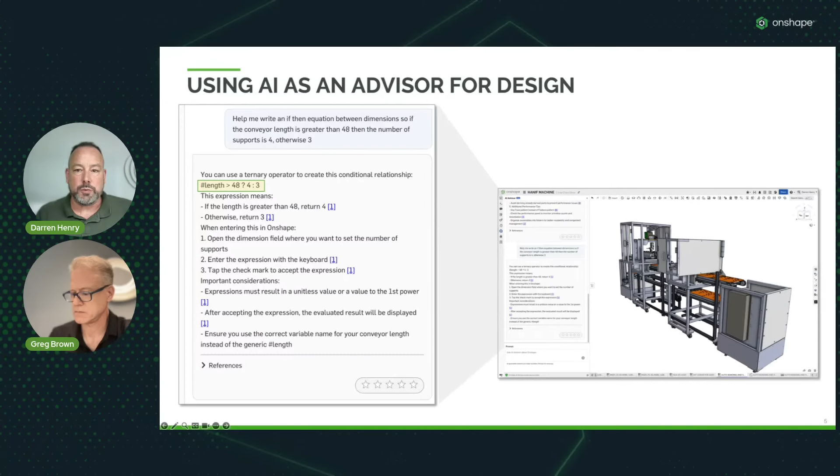But using AI as an advisor where you can have a natural language prompt and it assists you is just one way that AI is helping CAD. Another way is discrete toolkits. So we're seeing discrete tools that are purpose-built to do a specific task. We're seeing those appear in a lot of different CAD vendors' applications. And we're no different. We have a number of these.

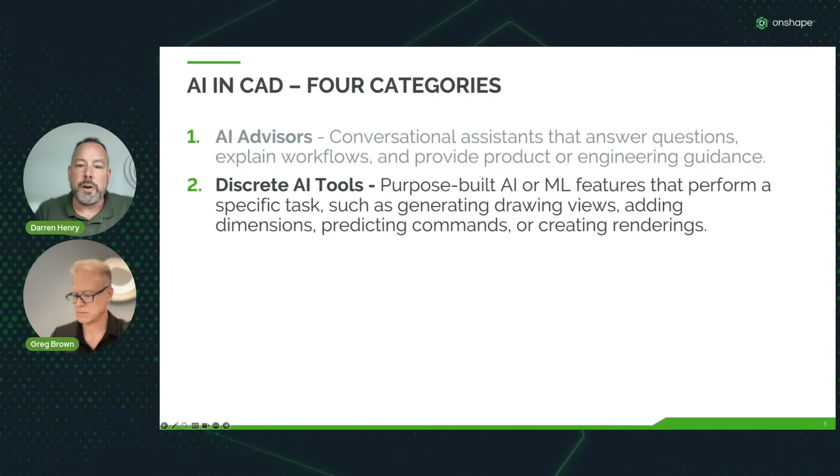You might be familiar with Onshape's replicate annotation. So this is using machine learning to look at a view, and if you choose to select that view and you want to replicate its annotations, you can pick a similar view, maybe in a completely different drawing, and it will use its machine learning algorithms to attach those annotations correctly. So if you're doing any type of family of parts, this is an extremely powerful capability.

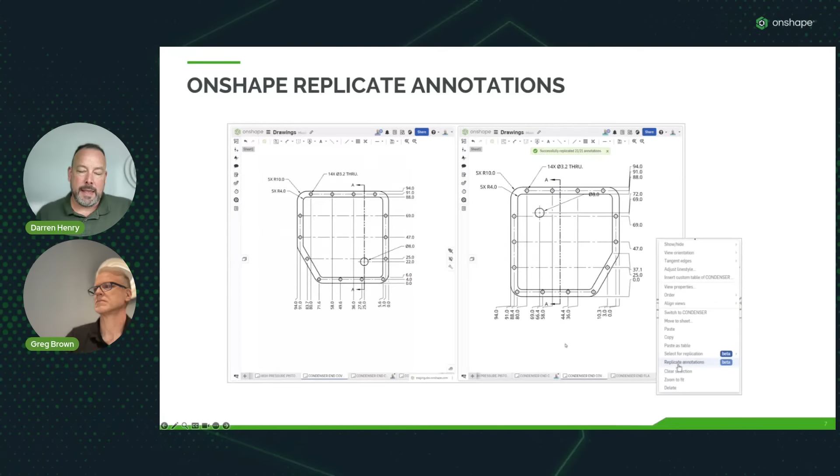It's just one example of leveraging AI or machine learning to build a purpose-built tool that will save you a tremendous amount of time. Now, you're going to see a lot of these types of discrete tool sets emerge, and some will fit your workflow perfectly, others may not, but the purpose of this is to actually save you time and work within the confines of the CAD system.

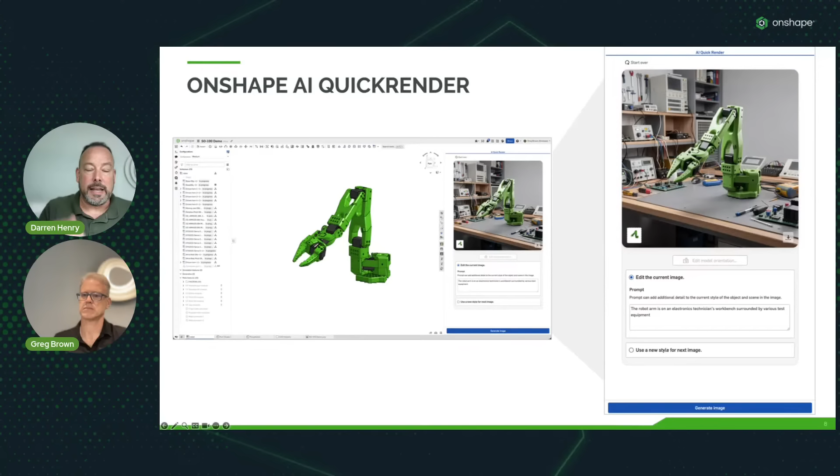So in many cases, we feel that ray tracing may be overkill for some of the applications you want. Maybe you want quick rendering, maybe you'd like to see your product in a sort of interesting environment. Well, quick render suits that bill. And again, it's a purpose-built AI tool that does a specific task. This one will be released through our Onshape Labs program. We'll talk a little bit about that, but right now it's in early visibility with some customers. We plan to put it in the hands of all of our Onshape customers in the near future.

A third way that AI is being integrated into CAD is through natural language agents. We've actually shown a number of proof of concepts at a lot of different events, but these would work in product similar to Onshape AI Advisor, but they have the added benefit of gaining context to your work, and they can actually execute tasks. I have an example to show you of an agent.

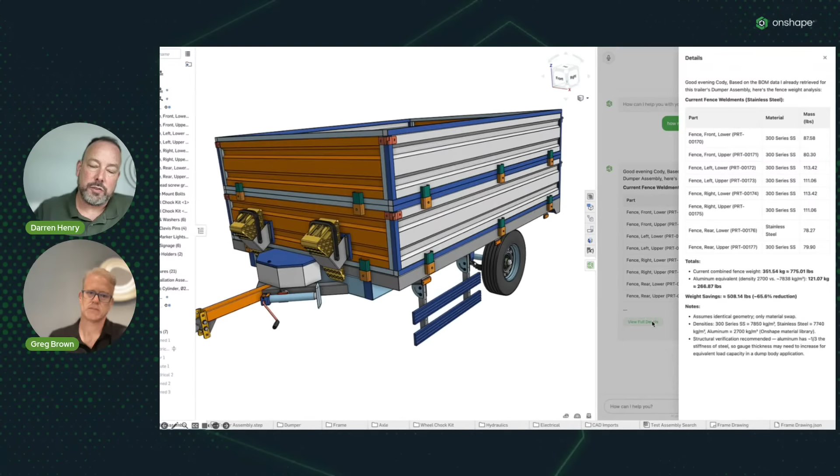So what will happen here is we're typing in a question, asking it, hey, if we change the fencing of this trailer from steel to aluminum, how much weight will we save? And the agent actually understands the model. It extracts the weight of the different fence components. It swaps the material for aluminum, and actually in this case, it can save over 500 pounds. So you can see that these types of agents will work inside Onshape, have access to your data and get context, and they can actually provide you important insight. They can actually do tasks, or they can be stacked to do multiple tasks.

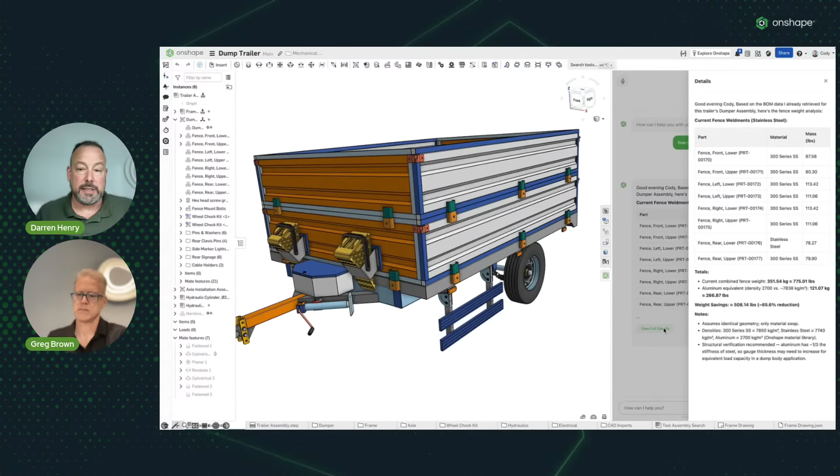How it works is we envision there'll be multiple agents, and when you ask a question, it will first go to an orchestration agent, which will then invoke the right agents. It's important to point out, though, that this has to be something that you have control of. And in our vision, you actually invite the agents to work on your projects, much as you would a teammate. So you have control over the permissions you give it. The task can be assigned, and actually multiple tasks can be assigned in natural language.

And what's really important is that you want to be able to have the agents learn about your information, but keep that information private to either you or your company. And that's something that we're working on. The other thing that's nice about dealing with a database-based system like Onshape is that we track all activity, so you'll be able to see what the agents actually do, and of course, be able to restore before the agents actually did those executions if you have to go back in time. So the key here is, as you think about agents working inside your CAD system, I think what you need to consider is, do you have control of those agents?

Is everything tracked? Is it clear what the AI agent did versus a human? And is it something that you can literally invite them to and then revoke access to at a later date? All those are things that Onshape is working on. You'll see agents in the product later this year.

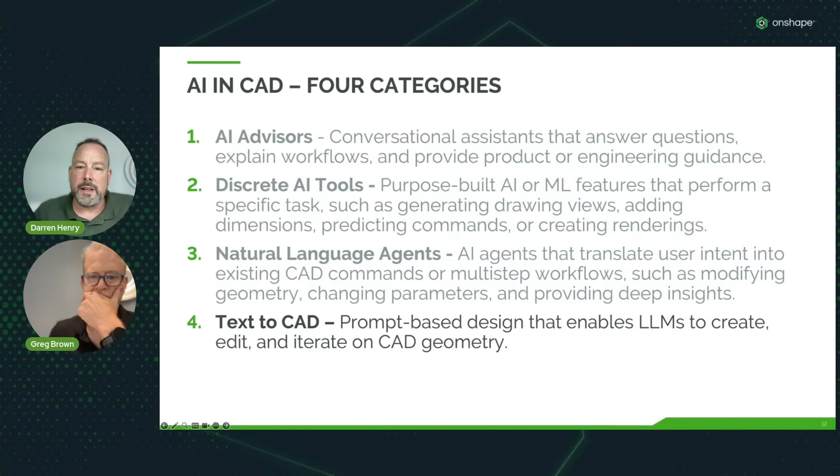And then the last category is text to CAD. And as I mentioned earlier, this is one that's getting a lot of hype. There's a lot of social media where people are saying, hey, I asked Claude to create a hinge bracket or a Raspberry Pi case, and you see that it's working on utilizing CAD and building these geometries.

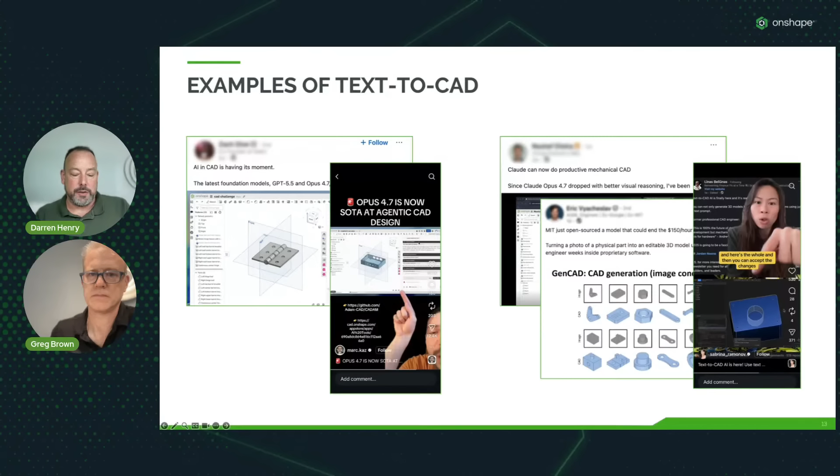Unfortunately, we think if you double click into some of these results, you're going to come to the same conclusion that we do, that it's just not ready for prime time. Here's what we're learning. We're seeing that most of the successful examples of connecting an LLM to a CAD application are yielding models that are low complexity and not easily editable.

But more importantly, we're finding that it's lacking understanding of the geometric relationships. If it had to create a sketch on a surface, in many cases it's creating a construction plane, not sketching on those surfaces. It seems to be lacking the understanding of the sketch constraints, the spatial interpretation, feature dependencies, as well as what's related. If you said, find me all the adjacent faces to a fillet, LLMs struggle to understand that sort of spatial recognition.

And we feel that this is a miss for what the market wants. The market wants AI to understand their domain expertise, build models with design intent that are robust and can easily be edited by a human.

To illustrate this point, we can ask an LLM to make a washer model, and it will do that. But if you try to edit that washer, you might find that the sketches lack the intelligence, the constraints. It doesn't know that the two circles are concentric. It may not know to apply the dimensions. That's a rather simple example, but it illustrates one of the challenges, that LLMs don't necessarily understand sketch constraints.

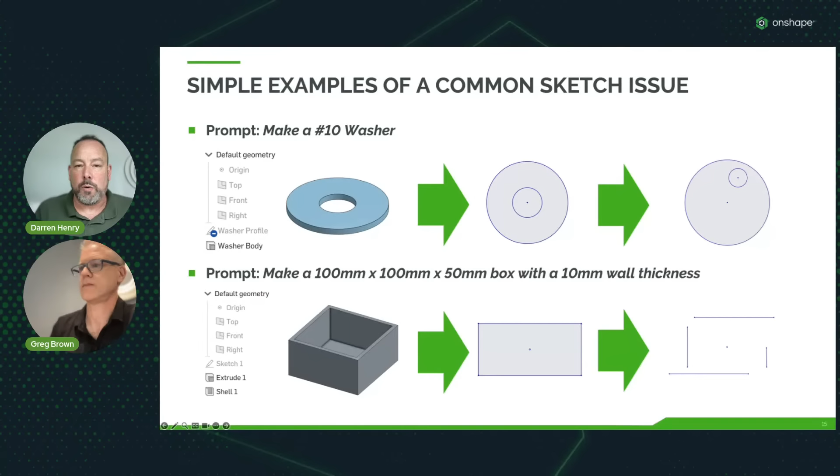What we do realize, though, is that AI is incredible at coding. So as we approach these problems, we think, boy, wouldn't it be great if we could code our way through all the different challenges?

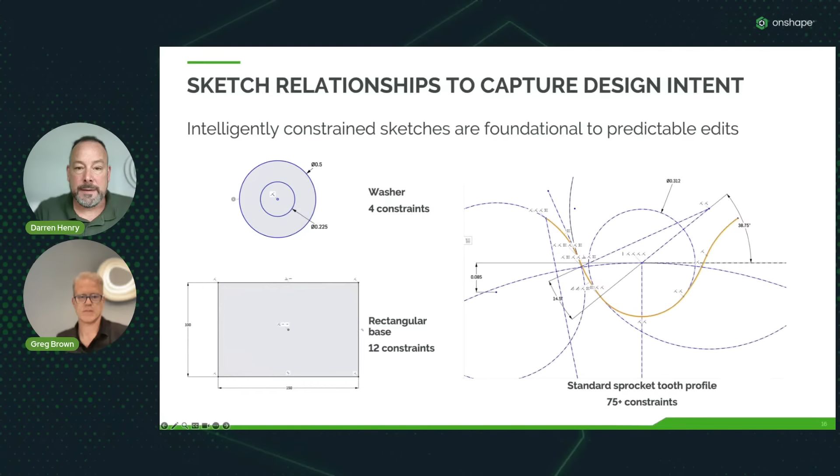And it just so happens that Onshape has a very unique coding language that we put in from day one. And our intention was a coding language that would allow our human users to customize Onshape to suit their needs. It's different than a scripting language, like a macro scripting language, which may let you push certain buttons or execute certain CAD commands in a sequence. What Onshape FeatureScript allows you to do is actually build new buttons, new CAD capabilities.

And in this example that I'll try to show with my mouse here, this is building a wavy spring. You can see that it actually built a single feature that captures this wavy spring. So we're building a new CAD command.

What's great about this is FeatureScript understands topology and the feature dependencies. It can query faces and edges and adjacent geometry. So it really understands, or can understand, all those spatial challenges that LLMs are faced with. It can easily regenerate features with design changes. So it's calculated much like an extrude or a fillet command, exactly like that. It's the same code that we use to build our features. And it really encapsulates engineering logic.

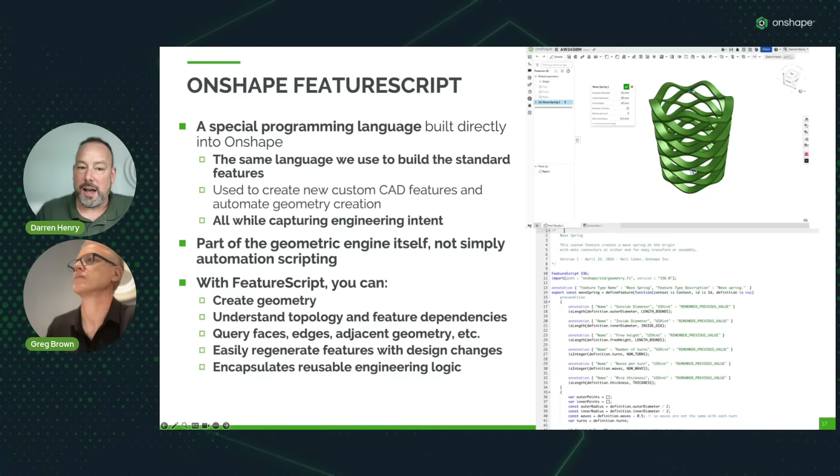So this is key. With FeatureScript, you can capture the design intent. You can build advanced features with feature dependencies. And the end result is human editable with a little interface that comes along for the ride, much like you see here for the wavy spring.

Now, the big breakthrough is that our teams at Onshape Labs have created an Onshape FeatureScript MCP. And what this does is it allows the LLMs to actually code FeatureScript, but not only code it, it will debug the code, write the custom feature, test it, run it within Onshape, look at the results, and iterate until it gets a result that it feels is appropriate, and then present those results to you.

So with the LLM, you put in a prompt, it interprets the prompt, it will prototype the snippet, write the feature, debug it, run it until it gets a result, validate those results, and then deliver to you. And if you want to then further test it and edit it, you simply reprompt again. So it's quite an interesting approach, and we're going to show you firsthand how it works.

But the most interesting aspect about this is it allows you to get a fifth powerful category of having AI work alongside your CAD, which is AI-driven customization. So not only will this build intelligent geometry, but it will actually allow you to extend the value of your CAD, actually tailor it to the needs of your processes or your products. And the other thing that's really exciting is it is available today through our Onshape Labs program.

So that's my prelude. I think I set you up nicely, Greg. Let me pass the screen to you, and we can take a look at some of this capability. Okay, we should be right now. Have you got the right thing? Yes. You can see my screen? Yes.

Yeah, okay. So hi, my name's Greg Brown. I head the product group here. So I'm looking after the product management, the strategy, the roadmap and prioritization. And this obviously is changing the game for ourselves and the industry. Thanks, Darren, for that setup. There's a lot of nuggets that I'm going to delve into.

But primarily, I want to take you through a series of use cases, all with the Onshape FeatureScript MCP, to show you that it's not just about creation of geometry in a standalone way, although that is a very common, very powerful and useful thing. But the rest of the spectrum might include things like creating reusable code for your own other custom features, or creating a sophisticated feature which doesn't stand alone but manipulates other things, all the way through some more code wrangling, which we'll talk about, to a sophisticated standalone application.

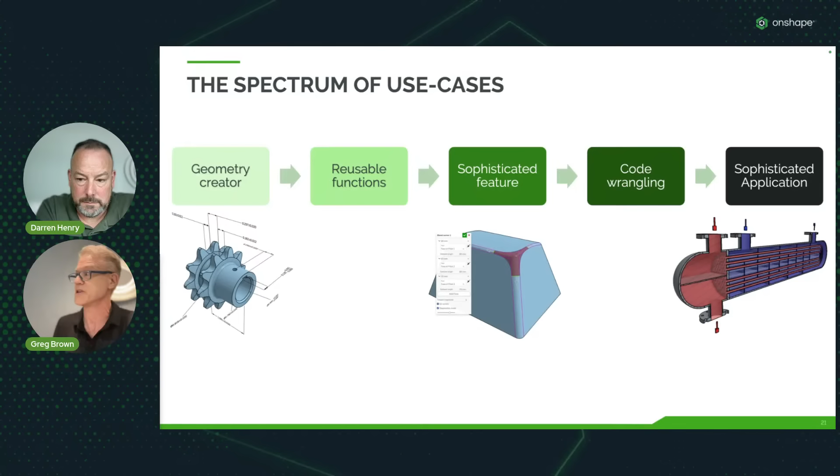And I did see a question in the chat that somebody wanted to see this heat exchanger example. So let's start with the standalone geometry creation. And I've got a bunch of different examples here that we've created using the Onshape MCP with an LLM such as Claude Code or Copilot.

And before I go into them, there are different approaches to it, but they all have the same thing. Basically, a single capturing of requirements fed into the LLM will create a custom feature, which then can be reused and shared very, very easily. So let's have a look at this live. Now, I'll show you it in use, and then I'll explain how it happened.

So I've got a feature. Along the top of the user interface of Onshape are the features that we create, and we use this FeatureScript language ourselves. But of course, you can create custom features. And now, using the LLM and Onshape FeatureScript MCP, you can create your own special features like this.

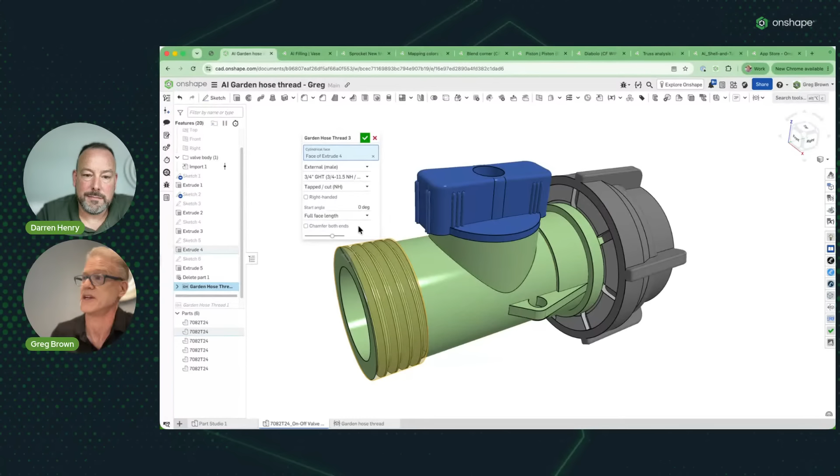This is a garden hose thread creator using the ASME B1.20.7 standard. The person who created this, I think it was Darren, prompted the LLM to say: I want a feature that stands alone in Onshape that allows me to select a cylindrical face in the model and cut the thread according to the standards and options provided. The prompting process built out the feature with all of these different options, and now this feature exists in Onshape's model as a feature.

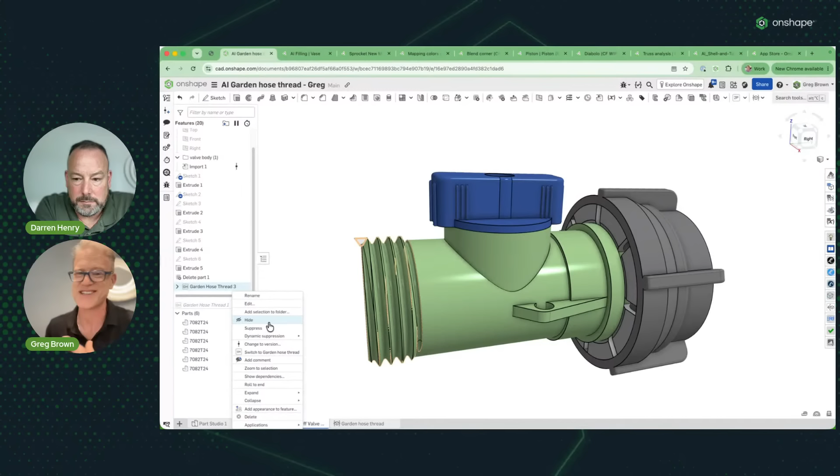You can do all the normal feature things to it. You can come back and edit it, suppress it, pattern it. You can do all of the things because it is a feature. This is the really important thing about feature script inside Onshape. I've got another example here, which is another really fun one.

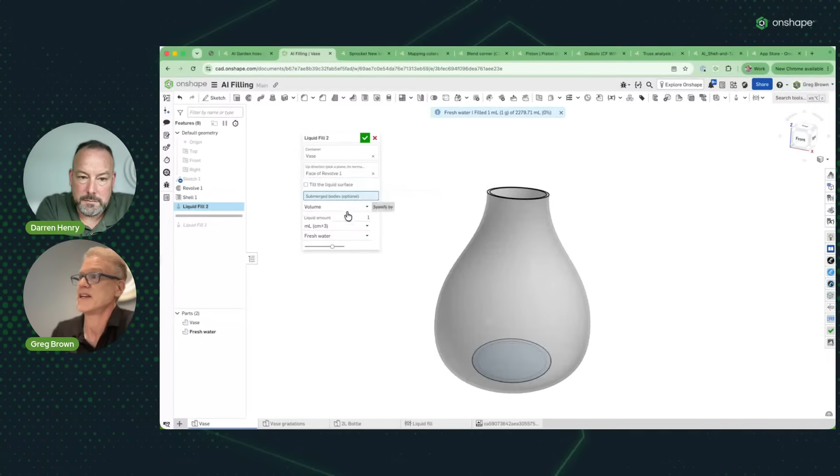So I've got a bottle, and the feature we're going to create here is called the liquid fill. I select the container, in this case the vase. I select a reference direction, and then I tell it how much liquid I want to put in, whether it's 1.75 liters, and it will work out the height of the liquid in there.

Again, the prompting for this was purely on the requirements and intent. I want you to be able to create a standalone feature in Onshape that detects the inside of the container, that detects how much volume according to different criteria here, maybe a percentage fill or a mass of a certain liquid. And then the MCP server is working in harmony with the LLM to create the code that creates this.

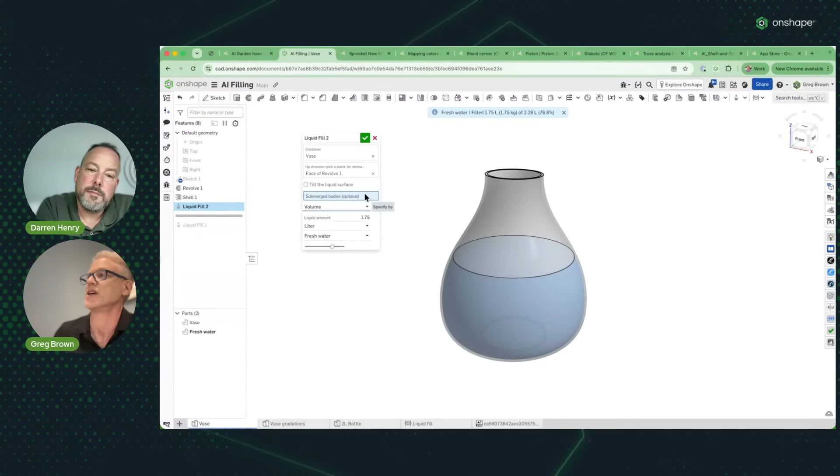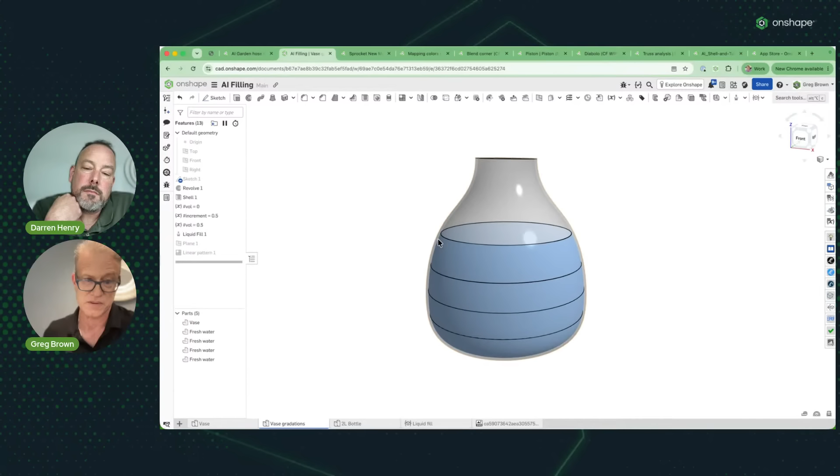Now this becomes really, really powerful when you take some of the other Onshape capabilities and make them work in harmony with it. In this case, I've created a liquid fill for the first 500 milliliters, and then I'm using a feature pattern that says let's do this for 500 milliliter or half liter increments. Now we can see we've created the gradation lines on the side of this bottle. This is just using the feature that the LLM and MCP server created, but then using it in a normal Onshape workflow.

And I can do things in a normal Onshape workflow, which is to go back and edit a sketch perhaps. This is where it becomes really cool, because we have an interactive way to affect that, and we can see the levels automatically updating and regenerating, because this is a feature. It's not a macro that we've created - it's actually a real honest feature inside Onshape.

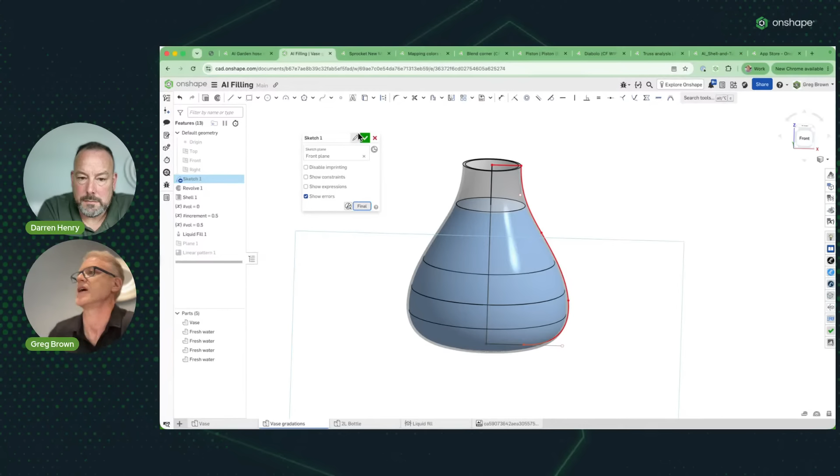Now this was done purely from prompting and requirements, and that feature is now usable - I can put this into my saved feature list. I've got a lot of features that I've created in here, and I can add this liquid fill to that one.

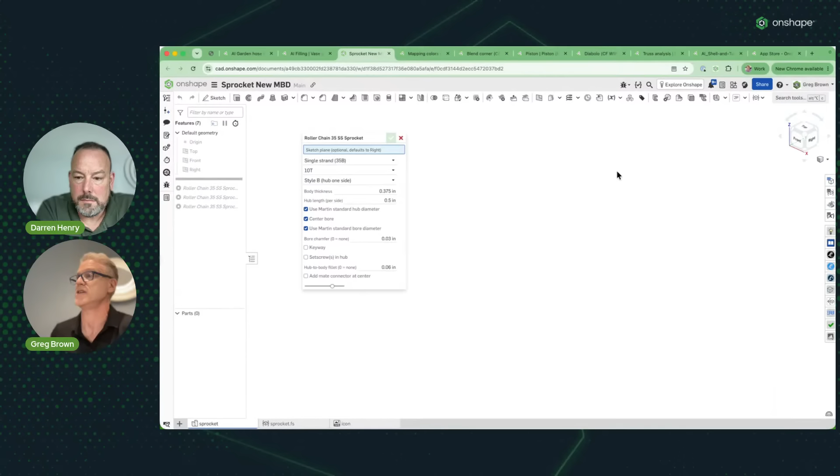Now, the third example of this geometry creation genre is a common piece of equipment you might be using: a roller chain sprocket. For a roller chain, the prompting was: I want you to create a standard roller chain sprocket using a certain standard, from a catalog that can be looked up online. And I want you to add all of the options that the catalog is providing, whether it's a single strand, double strand, or triple strand, or change the number of teeth.

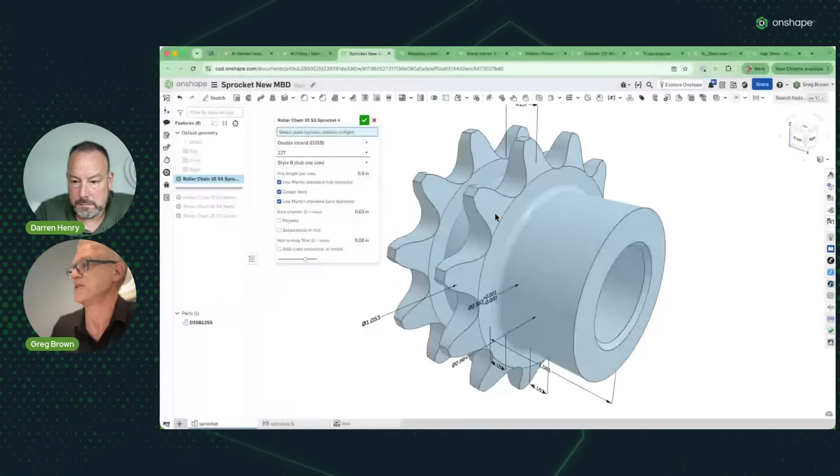And all of this is a pure parametric model built and driven by the standards of this particular catalog being used online. Options such as building the keyway in, or a set screw affordance as well. And then you can see how it's even got the nice cosmetic thread for the set screw in there as well, and there's some interesting annotations you can see on this.

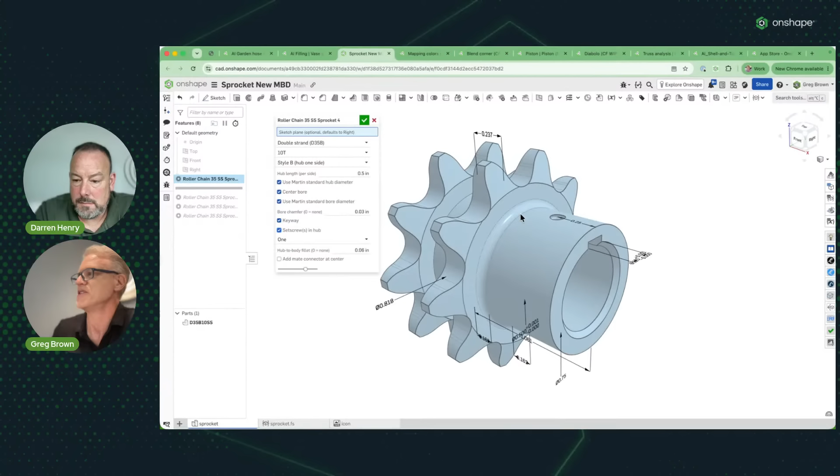All of the geometry, all of the annotations, all of the lookups to the actual catalog were created by the AI in conjunction with the MCP, so that the MCP server could tell the LLM how to create this, how to make the sketches constrained, how to make them parametric.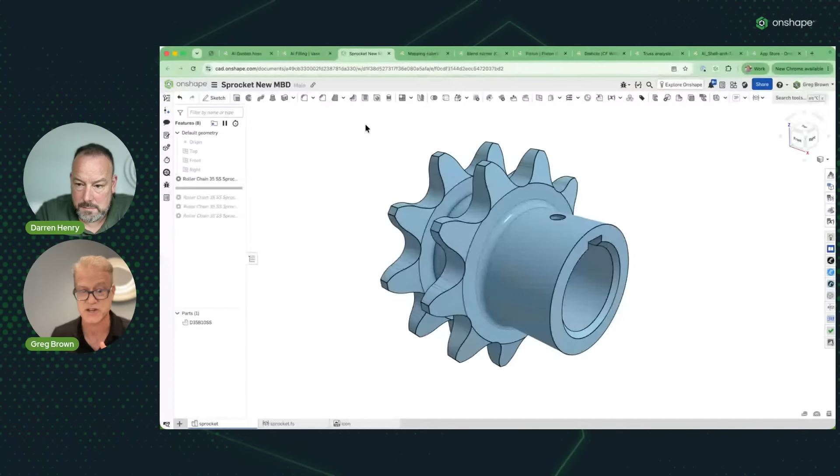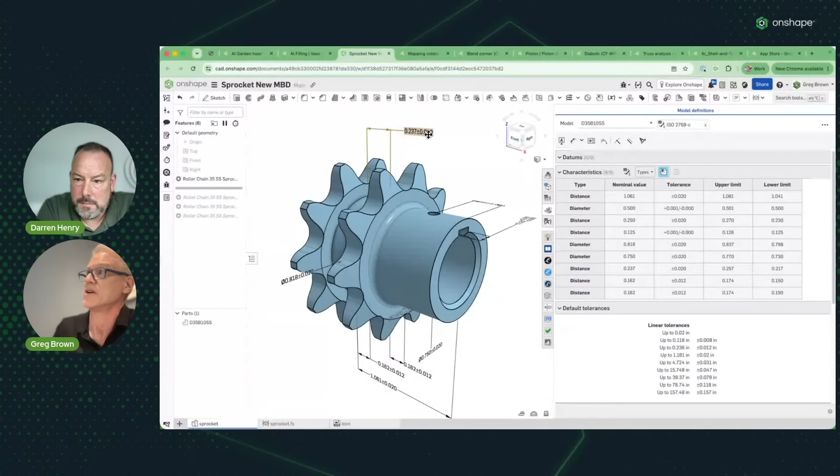Those annotations weren't just showing dimensions, they were actually the MBD annotations. We added MBD in Onshape fairly recently, but this is a really powerful use of it, because the LLM is doing the heavy lift as part of the feature to automatically create these annotations. And it works seamlessly, because if I add a default tolerance scheme, all of those numbers will automatically update.

So that's a really quick example, a few different examples there. Now I'm going to go over to a Visual Studio Code example to show you how it might look when you're operating this. On the right-hand side I've got my chat, and here I've got some code being generated by the chat.

I'm using Copilot, and I can choose what particular model I want to use, whether it's a heavyweight one or something lighter weight. You have to be careful, just like you do with AI. I started the chat saying, I want you to create kind of like a shrink wrapping feature that will take any model I give you and create an organic shaped shrink wrap around it.

And so we went through a number of different options. We all use AI differently, whether you're a pure programmer, a product manager like myself, an executive, or whoever, right? We all have different ways of approaching the chat. My way is, I know a lot about FeatureScript and I know how to program it, but I have more ideas than I have fingers to be able to type that code.

So using the AI and the MCP server has unlocked my own productivity insanely, because I can come up with a crazy idea and get a proof of concept in record time.

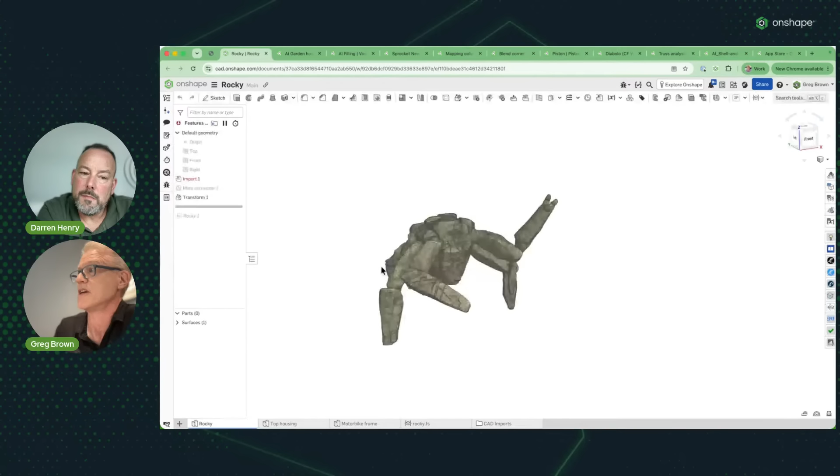So the crazy idea that was happening here was that I could bring up my model and take any geometry—if you've seen any films this year, you probably should see Project Hail Mary, it's a good film—and I wanted to create a feature that would take any object, including mesh like this, and encapsulate it in an environment just like Rocky would have wanted.

It's an interesting feature because it finds the extents, and it's not a pure tessellation. It's actually doing something a little bit more organic and creative. And I built that into the prompt. I said, I don't want you to just do a bounding box and tessellate it, I want you to do something that looked like the film. I used real human language to talk to the LLM to get to this point.

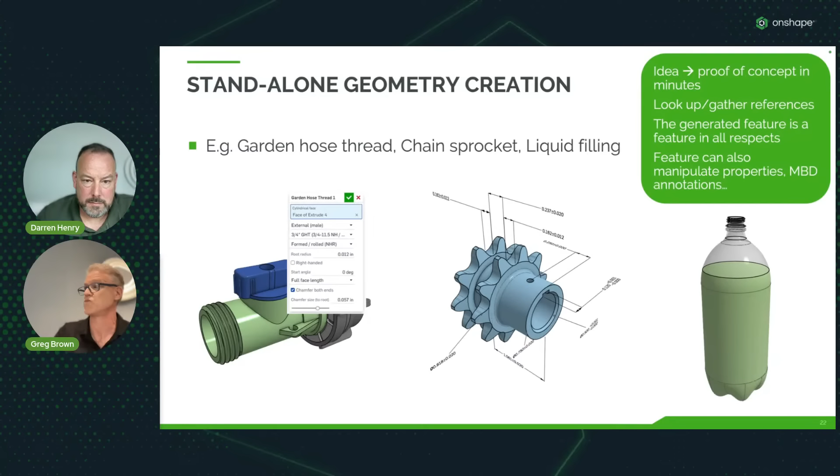So what did we learn? We can go from ideas to proof of concepts within minutes. We can go outside of our own thinking and look at searches online to get references from catalogs and so on. The features we generate, whether it was the garden thread, the sprocket, or the filling of the liquid, these are features in Onshape in all respects. They can be suppressed, edited, patterned, and all of those good things. They can also manipulate properties such as material appearances and MBD annotations. Very important stuff.

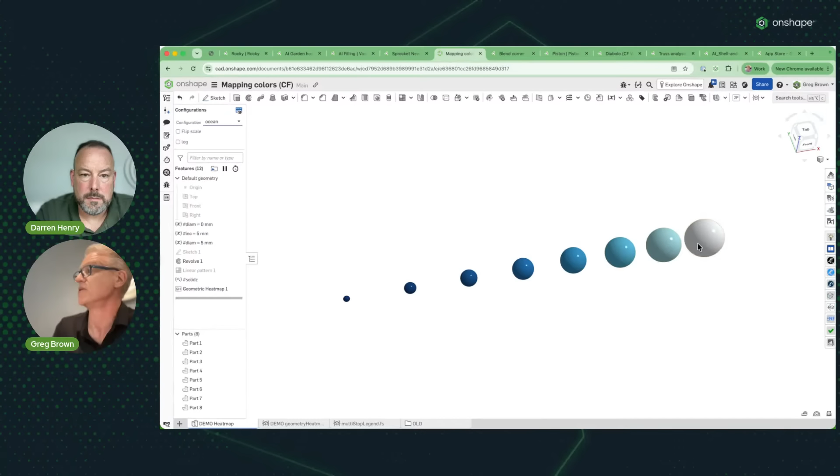Moving on to a quick one here, more for those familiar with programming already in Onshape with FeatureScript. What I found myself doing quite often was making a feature—I built one a long time ago which would color code parts according to their volume, surface area, or a number of different criteria. And I found I wanted to do the same thing in a slightly different feature, and another feature, to create some color spectrum.

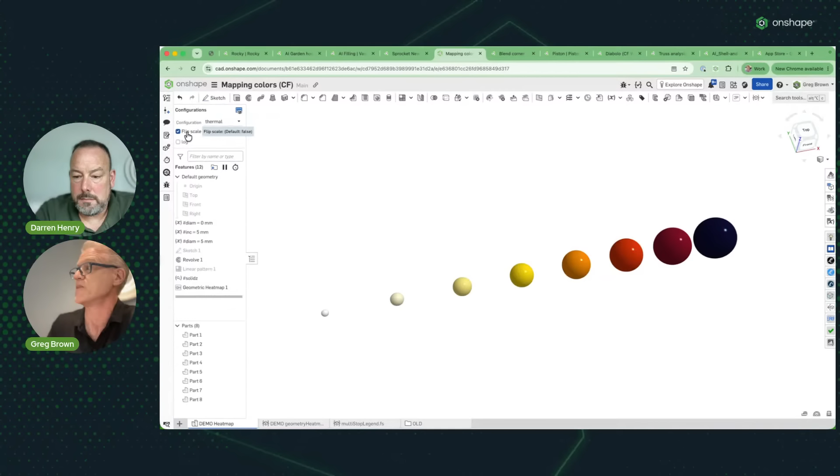So I got the LLM in conjunction with the MCP server to create a reusable set of code, like a library. The MCP server's benefit here was that it knew how to insert and put code into a feature studio, which is what's inside this Onshape document. Secondarily, it knew how to refer to it. So when I do a different feature, I just say, use my library to implement a reusable set of code that has things like different color maps, the ability to flip the scale from one end to the other, or to create a log scale instead of a linear scale.

That code function block is easily reusable. I do this all the time now because in my own custom features that I still build by hand sometimes, I have a library of reusable things, which is very valuable. So it's a really good tip to get the LLM not just to work on one feature, but to build stuff you're going to need in the future, and then tell the AI to reuse those things rather than developing them from scratch each time.

Which brings us to the next tier of sophisticated features. Sophisticated features don't just stand alone and create their own blob of geometry, but they interact with other things you might give it in the form of a query. You might find that a particular CAD system has different ways of doing things, and you wish that could be done in Onshape as well. So here's your chance.

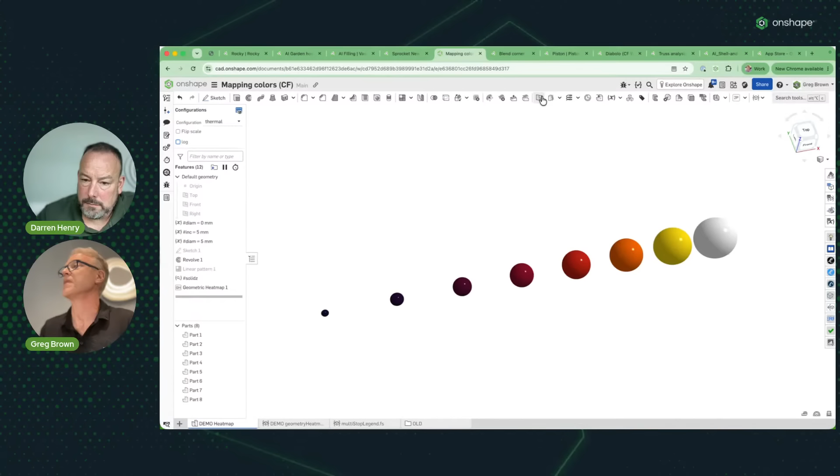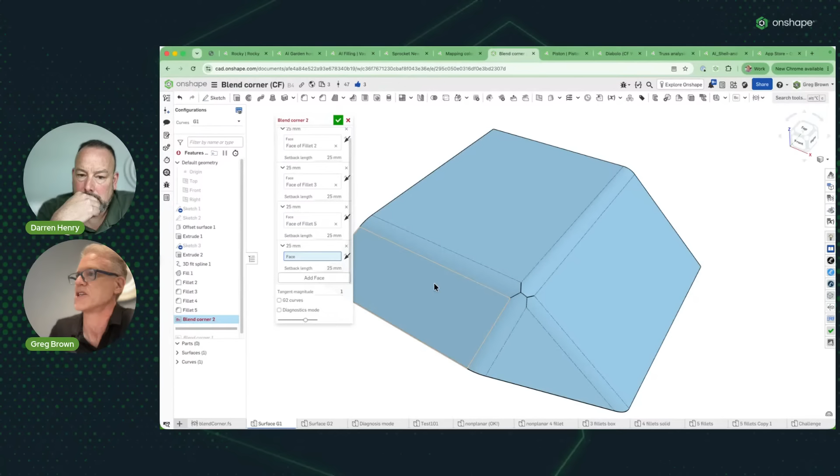With those requirements in mind, I went to my LLM, hooked it up to the MCP server, and got it to build this blend corner feature. The blend corner feature is pretty common in fairly high-end CAD, where you can choose different fillets that are coming together, and instead of just making a sharp transition, you can actually get it to do the blend.

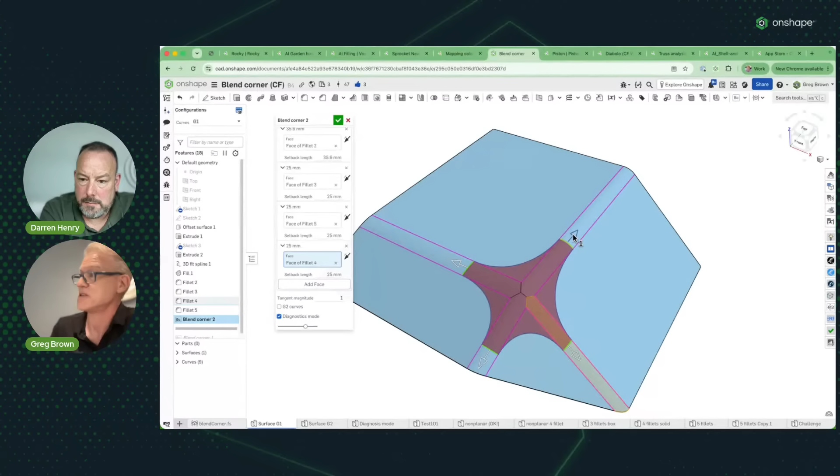So this is an interesting blend in the corner there. And if I go into my diagnosis mode — by the way, LLMs are so good at coding, they really appreciate it when you feed them information like 'please create some diagnostics' or 'please create some timing markers,' because you can come back to them and use them later. So this has got sophisticated things like the diagnostic mode, the manipulators. The manipulators on this blend, I can even turn into G2 curves so it's a smoother transition. And this is working on surfaces as well as solid geometry.

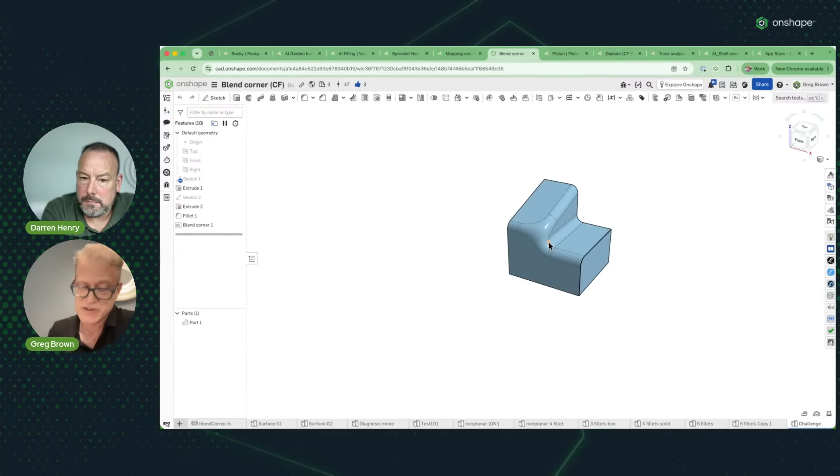So if I finish that, there's my blend corner. Here's the challenge problem that I also set it to do — things with convex and concave shapes at the same time. You can see the blend corner in there. So this is a really sophisticated feature that I've added, and there's way more of that opportunity as well.

The other one on the screen here was a section surface, or a conic surfacing feature that I created, and this was a very long-running project. Some interesting takeaways from this: if you have niche features that only you or your company deal with, it's a really good way to capture that.

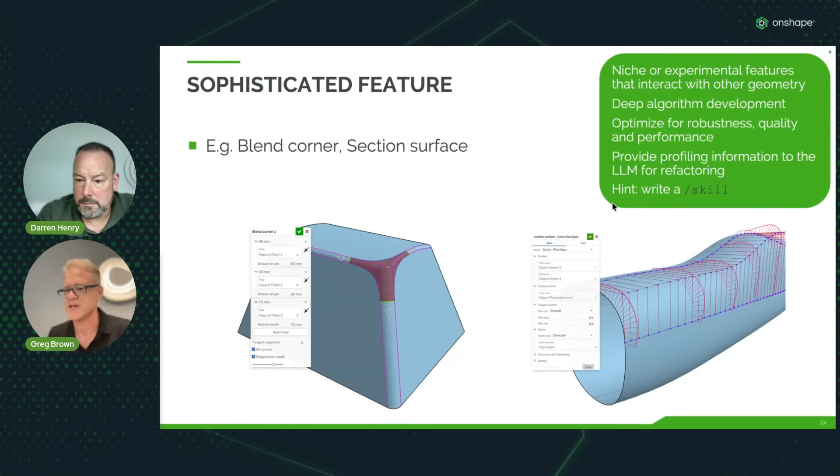You can use this for deep algorithm development. If you especially go onto one of the heavy thinking models, or wind up those controls for heavy thinking, you can get it to really nut out some crazy algorithms in there. You can ask it — because again it's so good at coding — to optimize for performance or quality or robustness or readability. Those are really good prompts as well.

I used the profiling information from some of the diagnostics, as well as the profiling information from Onshape, and fed that back and said, look, this is what the profiler is telling me, can you go fix it? And it found ways to optimize functions or to use other built-in functions rather than some slower things.

The big hint from that is that once you're developing your muscles around this, you can capture it as a skill. I'm not going to go into how skills work today, because that's its own lecture or presentation. But it's really, really powerful when it comes to pulling all these pieces together, so that next time you do something, it's actually going to be even faster.

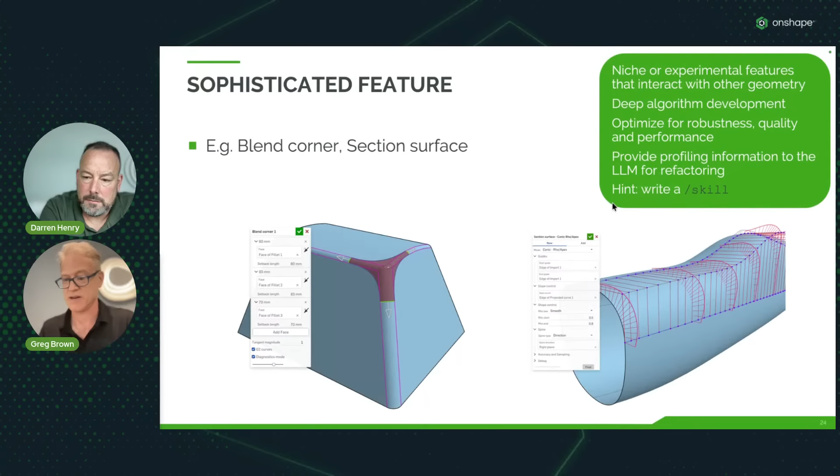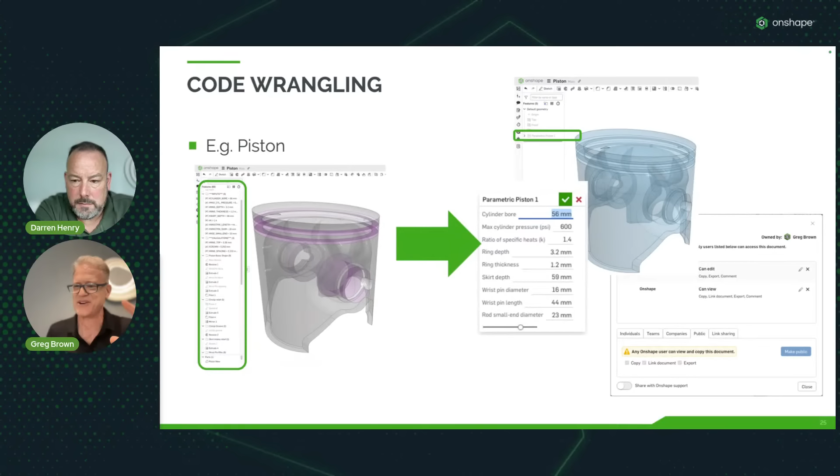So level 4 is code wrangling. Code wrangling is dealing with code that already exists and then making something out of it that is even more valuable than you thought it was going to be in the first place.

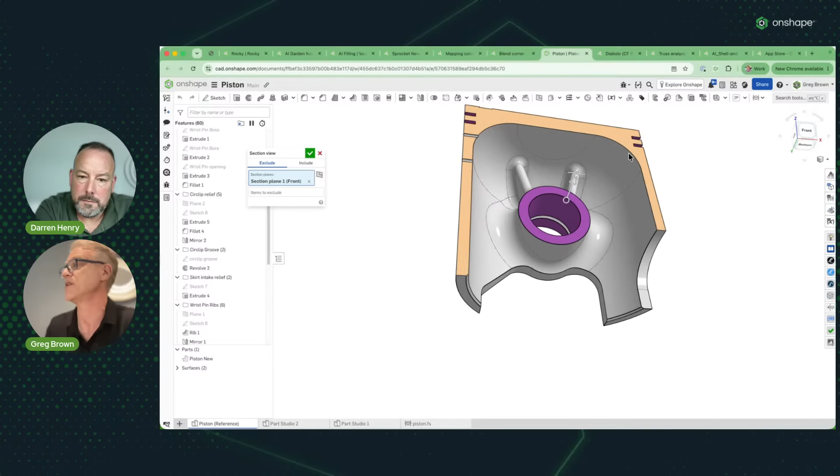So this piston model here was something that I built quite a few years ago, and you can see here there are about 80 features. It's pretty accurate. I actually reverse measured it all with mics from my motorbike piston. So it's got a fair bit of information in it. It's got a lot of design intent in it.

There's variables up here, and some of these variables are actually expressions. For things like the thickness of the top of the piston is based on some kind of equation in there. But it's 80 features. So now, the point is that when you do this, and when you've been doing this since forever in Onshape, we're actually creating the FeatureScript behind the scenes. This is how Onshape works.

I can show the code that we've been creating here, and this is not intended to be really human interactable. This is just showing you what all the code was that went into creating this beautiful piston. And you'll see here, there's a lot of really complicated stuff with sketch constraints. So as Darren was pointing out before, sketch constraints are hard. And also queries between things, they're hard, right? And that's what a lot of this is all about, is the queries and the sketch constraints. But LLMs are really good at handling code.

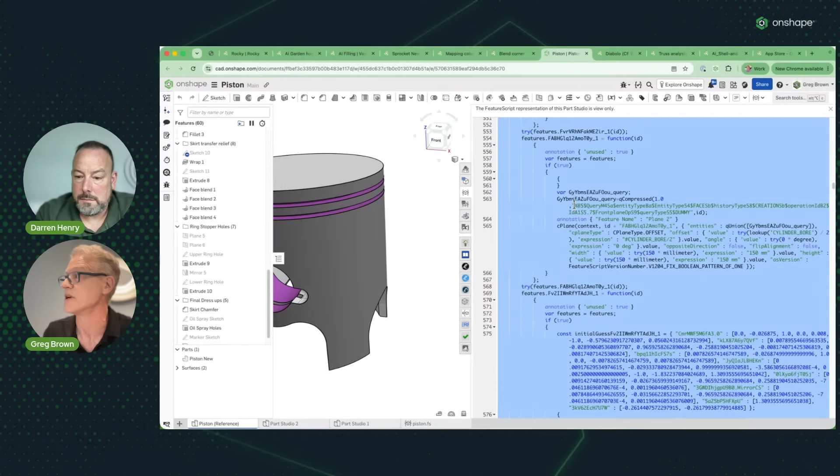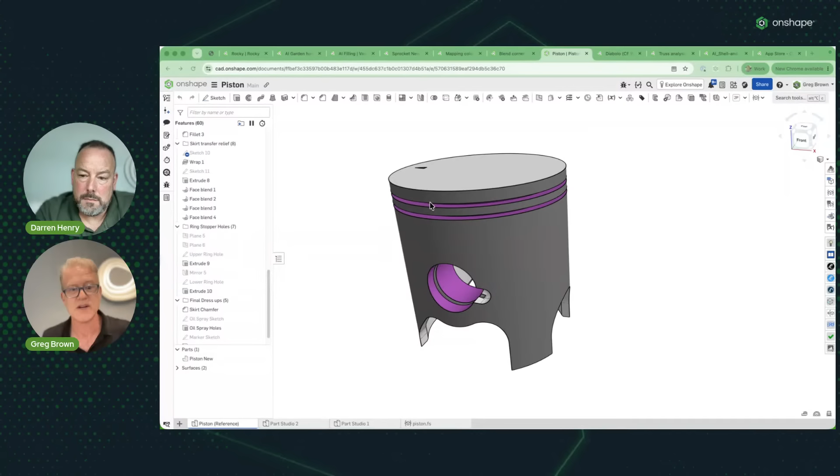So what I did is I copied all of that and then dropped it into my Visual Studio Code again, and then said to the LLM, turn these 80 features represented by these 2,000 lines of code into a single feature. And that's what it did. So you can see here, it's even called it a parametric piston. It came up with a good name. I didn't come up with that name.

And it tells me here what it did. And there was some special information that it left breadcrumbs for itself about how it's going to handle these queries. So that's really, really interesting information. And so the net effect of that is that now I have a single feature called parametric piston. Now, not everyone's going to need this, but perhaps you do a lot of these, and you want to reuse this, and you want to be able to replay this many, many times.

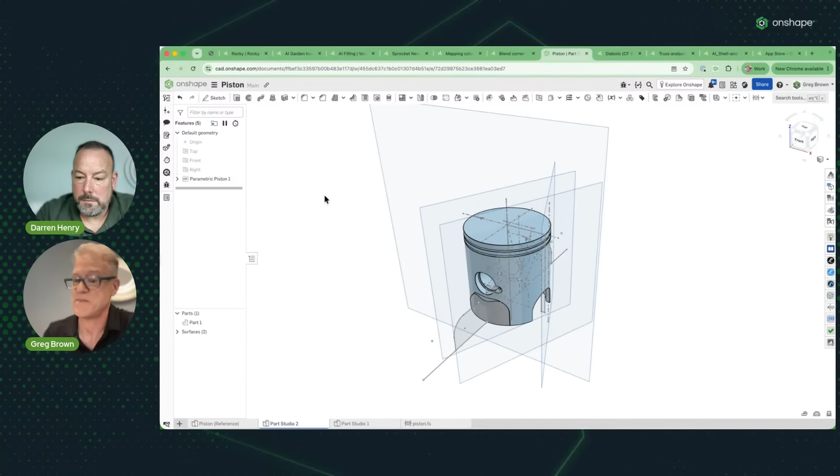So now you can see it's created all of this completely on its own, right? And it's taken my variables, which were features in Onshape, and it turned them into inputs in the user interface, right? And it represents that as a single feature in the tree. Now, you can say, oh, well, maybe you could have done this with Derive, and maybe you could have shared this. I want this as a single feature so that I can pattern it, so that I can do all sorts of other things.

And the really, really powerful thing here that we need to point out is that it uses the platform of Onshape to really flex and extend. I can share this, and I can make it public. I'm not going to do it today, or maybe soon, but if I press this button here, all of that work that we've done now becomes publicly usable by every Onshape user in the world the instant that I press that blue button. Right. And I can unshare it as well. So that's an important thing.

So, that is a real power of going to the next level of features that I'm going to be using in my day-to-day life. You can overlay these two things, by the way, on top of each other. They're absolutely pixel perfect. Now, there's a slightly different variation on that of code wrangling still.

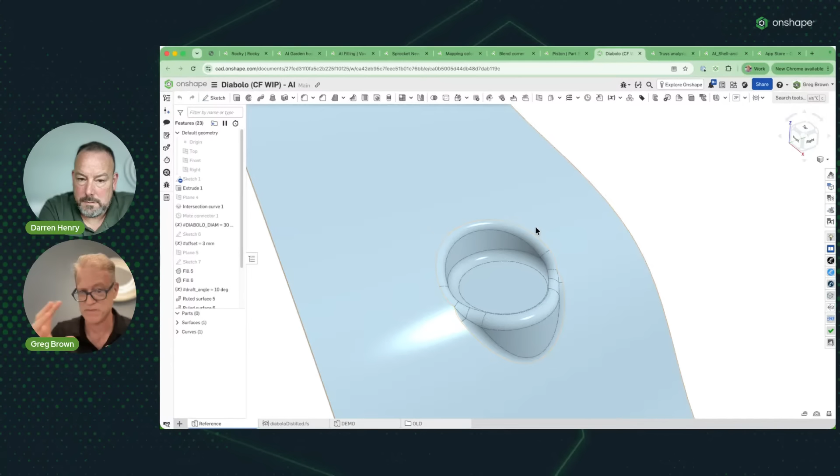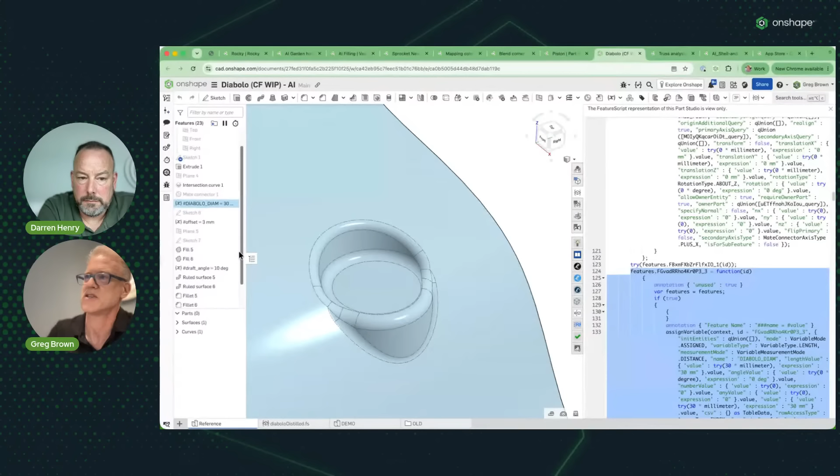And rather than copying an entire part studio, which is what I did before, maybe I'm just going to copy some features. So if I look at the code, this is a little boss joint that's commonly used in various industries, and some people call it a Diabolo. So we'll call it a Diabolo today. And if I show you the code, I can say, I'm not worried about these first few features. I want you to copy from this feature down to this feature. All right. And you'll see over on the show code, this is just normal Onshape I'm running, by the way, at the moment. So I want to take those features.

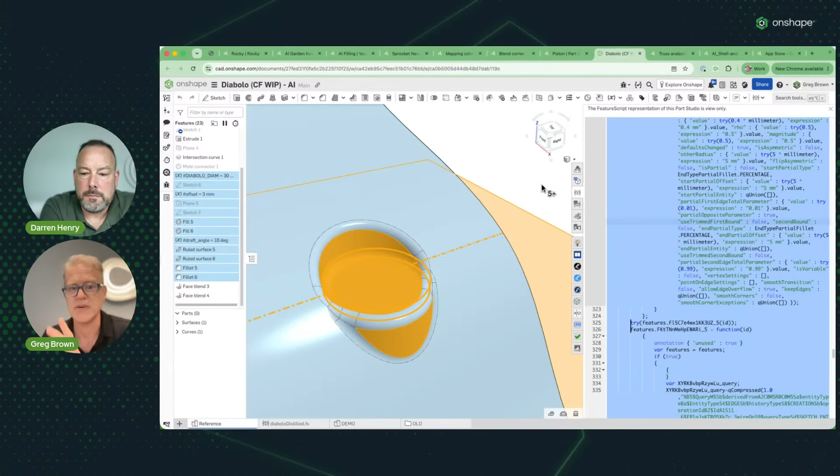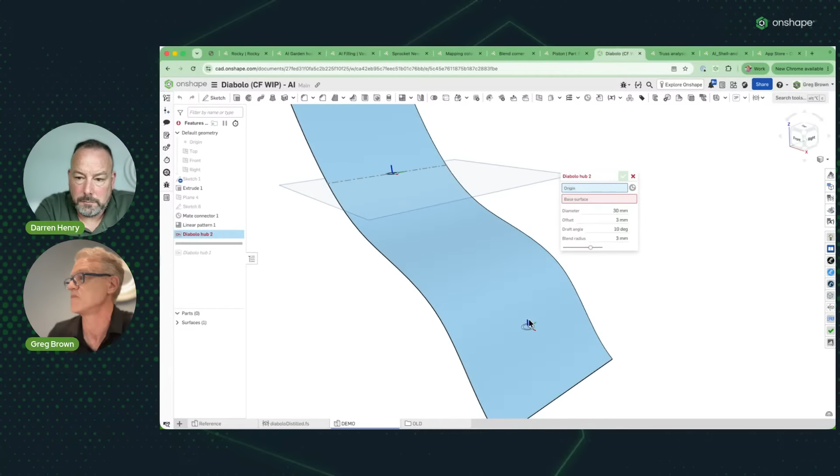And this is the really cool bit, it determined that it needed an origin and a base surface. These were the only two queries it needed. And it worked that out from the code snippet that I gave it. That's kind of cool, makes sense, but it's also mind-blowing at the same time.

So, you know, here I can put this feature in, and of course, now it's parametric. Of course, it retains its parameterization. And it's a feature. Again, we can copy it, we can pattern it, we can suppress it, we can do all of the featurey things to it. So that's what I call code wrangling, for want of a better word.

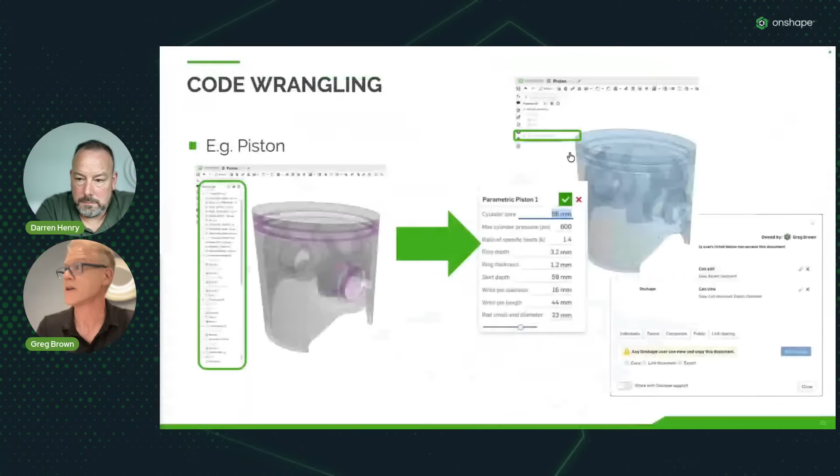And there's a lot of stuff goes on behind the scenes for those queries, especially the queries that were dangling, for want of a better term. The queries were dangling when I took them out of their original context and put them somewhere else.

So featureization of existing code, you can turn lots of features into a single feature, retaining the parametric benefits, and of course, then sharing that, just like any other custom feature, is a hallmark of the platform we're building on here. These things don't exist as scripts or macros on their own. They're a part of an Onshape ecosystem.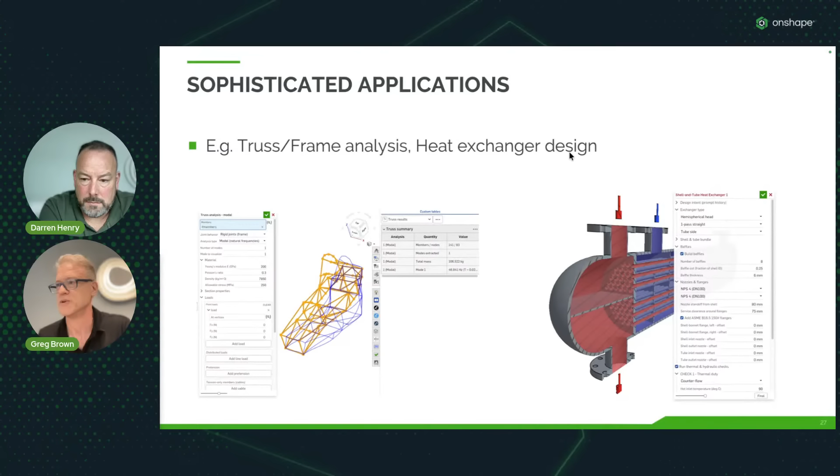Which brings us to the sophisticated applications. The spectrum starting from standalone geometry creation extends all the way to sophisticated applications. So this is again using FeatureScript in Part Studios, obviously, but it involves a lot more logic, a lot more decision making, and in some cases solvers. So I'm going to show you a couple of examples here because these are my favorite ones.

So here is the chassis of a Formula SAE team. Shout out and thanks to the Olin team for that. By the way, these are examples that I've done for the purposes of this webinar. I'm not saying they're all what you need, but just to give you a sense of the scope and possibilities, right? And the hint there is that the scope and the possibilities are virtually endless. Your human creativity is really the key here as well.

Anyway, I started chatting to my LLM and said, I want you to build an FEA solver, and I want you to do beam analysis inside the Part Studio, because I want to give a first pass analysis for both static and modal for the beams that are represented by any curve or sketch entity that I give it. So that's what it did.

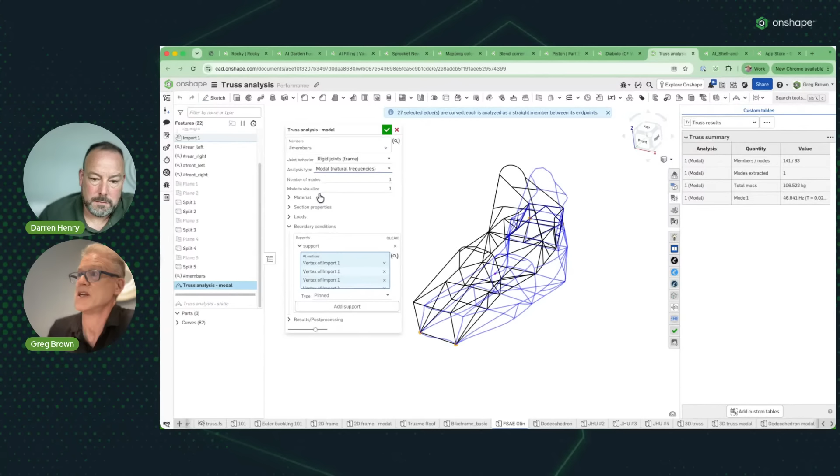It allows me to do static or modal analysis. You can set different material properties here. You've got a library of different section properties. You can load it up in different ways, including pre-tension. And I also told it that I wanted to do tension-only members, like cables. And then it came back to me and said, that's going to involve a nonlinear solver. And I said, sure, go for it.

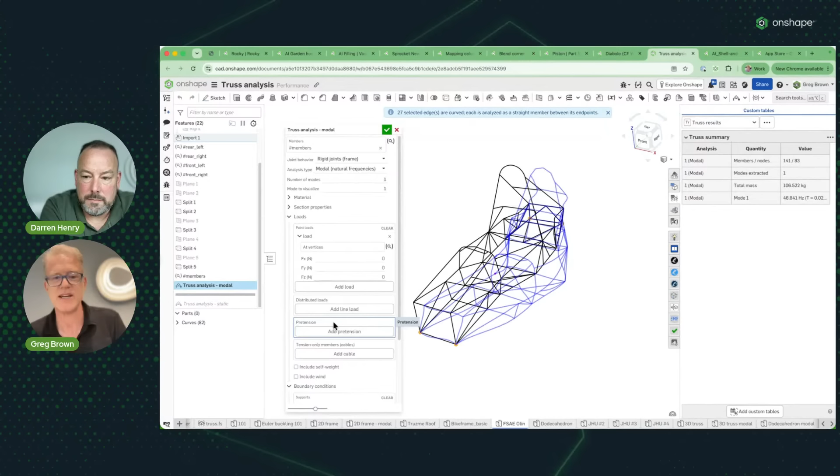So it went and did what it needed to do to pull together from the open source, from the community, from many decades of this being done, and put together a real solver. So it's doing that here, and you can see actually the deformed shape. And I gave this one a lot of prompting because my background is with FEA and simulation. It did all of the heavy lifting behind the scenes, including, and this is foreshadowing the final example, creating these really nice custom tables to summarize the information.

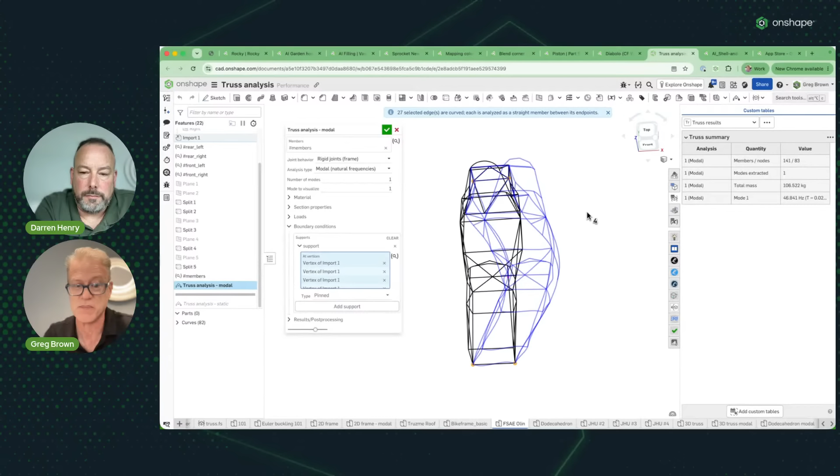Here it's got the total mass, this has got the first frequency, and by the way, I have verified this frequency against about 2 or 3 other well-known FEA codes, and I'm not saying this is an FEA solution for everybody, but it's an incredible first pass tool. Right, so minds were blown, kind of, I blew my own mind here with what I could do with this. And if you have a look at it here, this was taking 2 seconds to solve.

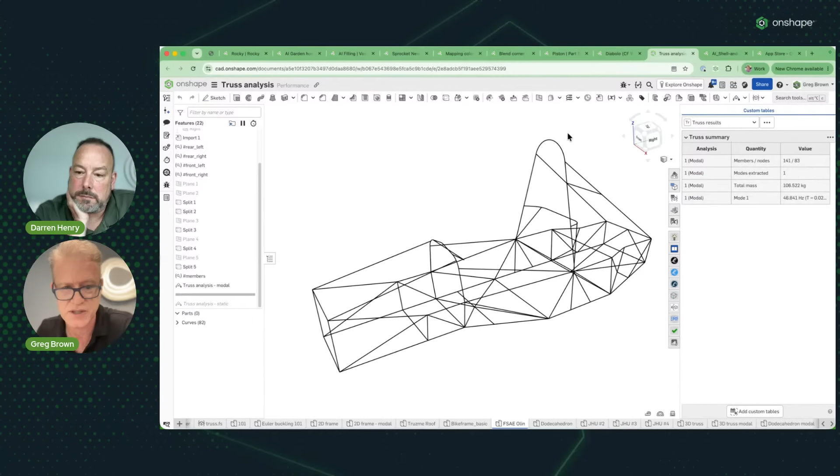Again, I'm really hyper vigilant about how much regeneration time that I might be asking the model to do. So I got the LLM to think about the solvers that it was using, and it generated subspace solvers in place of a direct solver, those sorts of things. Very good at that.

Now, the final example here is the one people might have seen before, because our own professor, Michael Flesch, has been really, really successful in generating this. So, shout out and props to Mike for all his hard work and persistence in getting this one.

What it is, it's a shell and tube heat exchanger creation tool. So it creates, really, it's a system here. It's not just a part, it's a system of parts. And again, based on prompting, saying using standards, using these kinds of approaches, put together a feature which builds all of the stuff that you see on the right-hand side.

So you can see there's just different choices for the class of heat exchanger, whether it's a 1-pass or 2-pass, what side, whether you want baffles and whether you want all sorts of ASME-based standards on this and that. And the really, really interesting thing is do a whole bunch of checks and design checks, such as the hydraulics or the thermal analysis there.

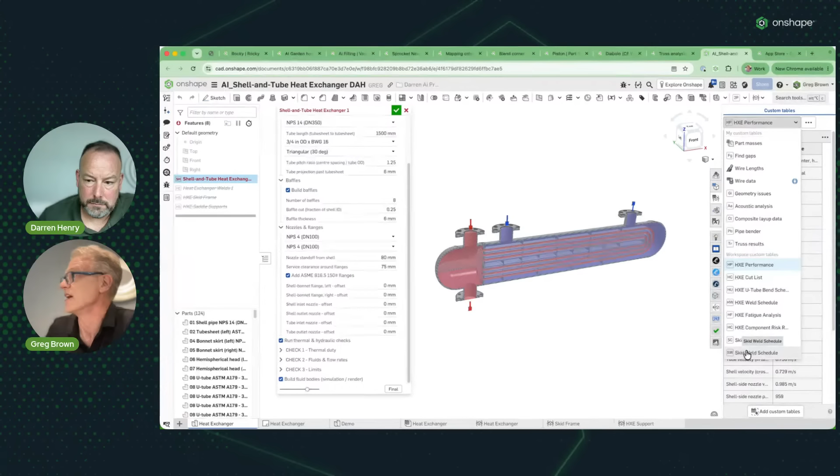And you can see here, this one particularly creates a lot of really, really interesting tables from the heat exchanger. And I've shown you the performance ones here. So it's actually giving you the readout on the Reynolds number in the shell versus the tube, what the heat loss is, what the intake versus exit temperatures are for the hot and the cold side. All of these things are being calculated as part of the feature.

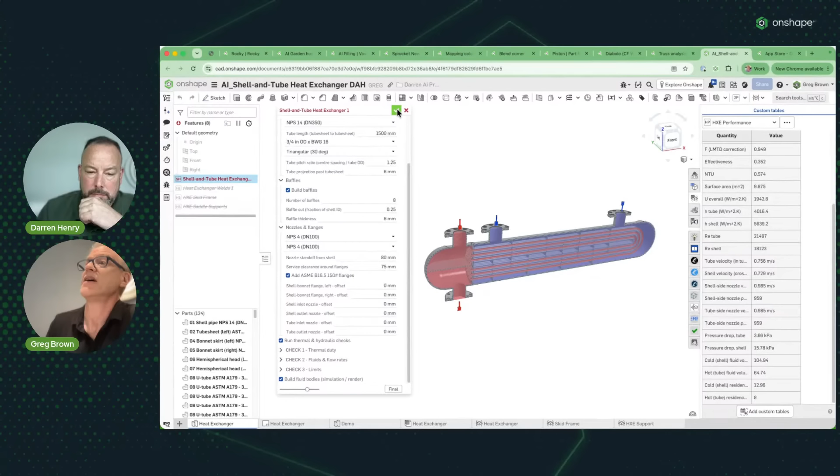It's pretty incredible to see how much you can pack into here, because it does, again, involve solvers. It involves a lot of logic. It involves going outside to get these standards and bring them back together. And again, encapsulate that in a single feature, which can be shared, which can be reused.

Now this feature is done. The results from it are deterministic, right? It's not vibe coding or vibe engineering the results each time. That's an important thing to know. And I saw in some of the questions people have been asking about, is it going to use tokens each time we use it? Is it going to come up with different results each time we use it? No, right? The LLM was involved in the creation of the initial feature, not on the subsequent rerunning of it.

So I think those are some really important takeaways here before I hand back to you, Darren. And that is, you can do a lot of deep research and discovery and implementation of custom solvers, and really, really advanced stuff. Again, LLMs and coding LLMs are perfect for this kind of activity. The MCP server to Onshape's FeatureScript just allows it to close the loop and make the connection to building robust, running and successful Onshape models.

All these tools work seamlessly with everything else in Onshape. For example, with the truss analysis tool for that chassis, I was using query variables to grab all of the frame segments so that I could then feed that into my feature. That's just a natural thing. Configuration works the same way. Just configure this feature just like you would configure any other Onshape feature.

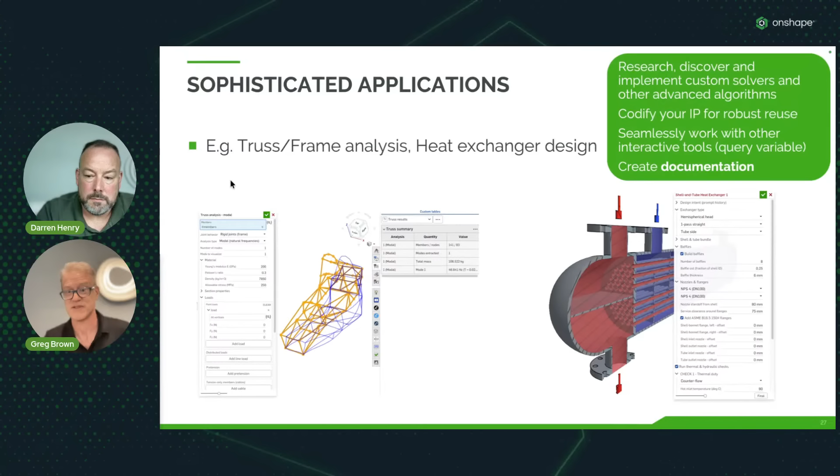There you go, Darren. Yeah, I think all those examples were great. Someone asked, how reliable are these features? Well, every demo that Greg showed you is live. FeatureScript custom features have been used by many of our enterprise customers. So I think we have the confidence that they are robust and won't fail you, as we do it live. I just want to highlight a couple of things with this new approach, text to code to CAD, since there was a lot shown. So let me just make sure everybody picks up some key takeaways.

Number one is the complexity of the geometry. What you saw was custom features, custom parts, like the sprocket components. You saw systems of parts, like the heat exchangers, and advanced capabilities where it's actually converging on solutions, like your truss analysis. We did capture design intent, and it is editable through the interface that is built by Onshape. In the case of the sprocket, I mentioned how complex that tooth profile was. It captured it without problem, and you could change the sizes and the number of teeth very easily.

The other key, I think Greg actually discussed quite a bit, but once it is codified with a custom feature, the results are always deterministic. If you give the interface the same inputs, you'll always get the same outputs. And the beauty of that, obviously, is the efficient AI token usage, where you only go back to the LLM when you want to add functionality or correct any error that you might have found within the custom feature.

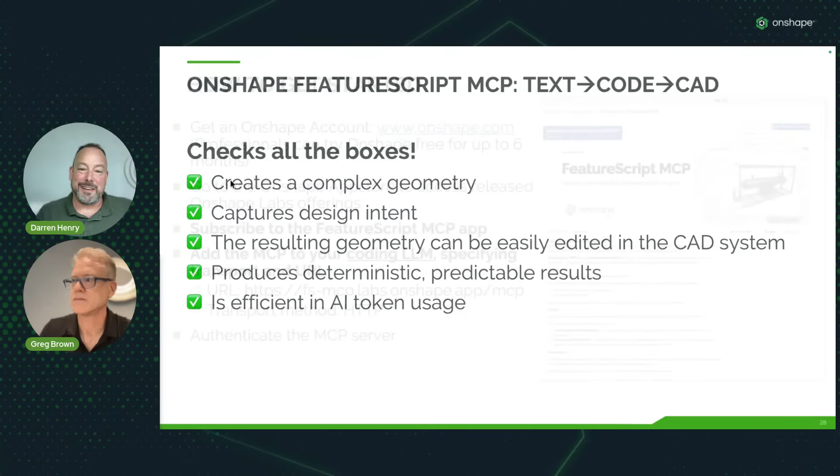There were a lot of questions about how to get started. Let's go to the next slide, and we'll show how to get started. So today, the FeatureScript MCP is available in the Onshape App Store. If you go to our homepage right now, onshape.com, the banner is actually a takeover about this new technology, and you can click on it. But you'll have to go to the App Store.

First, I guess you need an Onshape account. So if you don't have an Onshape account, you'll need one. The good news there is we have a lot of different plans, and professionals can sign up for free for up to 6 months with the Discovery program. Then go to our App Store.

You'll have to subscribe to the FeatureScript MCP, and there's some instructions there to add the MCP to your coding LLM. Now, we do say coding LLM, so you want to use a model that's good at coding. Internally, I use Opus. I started doing this at 4.5, but I use the latest Opus build.

You'll have to specify a transport and URL. The good news is if this is difficult for you, just ask your LLM how to connect an MCP, and it'll prompt you through that. And then you'll have to do some authentications. You'll probably have to click a URL and authenticate that it has access to your Onshape account.

We're getting a lot of questions, Greg, so why don't we move ahead to the questions? Yeah, okay.

One question that I did see is, you showed the end result, the features live. Why not show how you coded it live? I want to just tell you that we could do that, but it's actually not an exciting process. You'll actually talk to the LLM, and it will make sure it can connect to Onshape and start building code. But generally, it takes up to a half hour to generate something like the sprocket that you saw. I did a bushing. It actually took 36 minutes, and now it's a configurable bushing with many different sizes.

But basically, you're watching it test and iterate through a console screen or a terminal, and it will tell you how long it takes. Typically, the standard components that I've created, the bushings, the sprockets, those types of things, are done under a half hour. More complex things like the fill command, that might take up to an hour before it gives you a result, and then you test it, you reprompt, and it might take another hour. So we could show it live. It's just not very exciting, and you'd be staring at a screen. Yeah.

Well, if you have questions, type them in. Another one that I think people recognize is we do expect an explosion of custom features to hit the market. Just internally, we've created dozens. I've created a ton without any coding experience. We do recognize we need a better way to manage and surface different custom features written in FeatureScript. So I saw that as a comment, and it is something that we're talking about and working on.

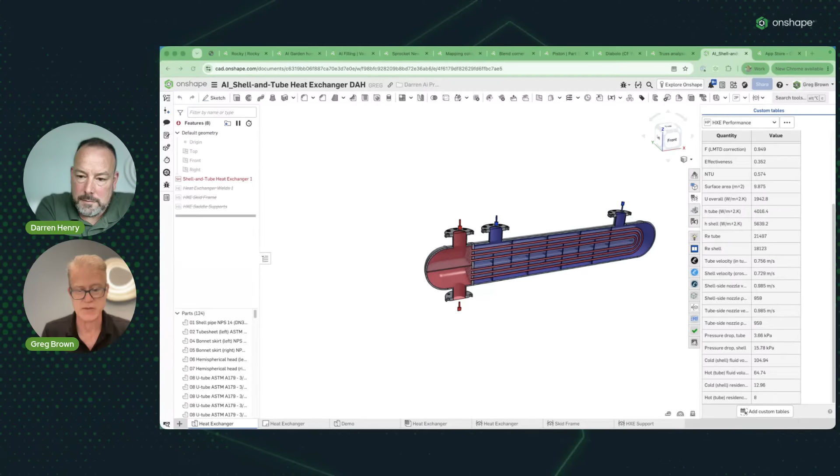Yeah, please, Greg. A question about, will there be AI integration with PCB design? Now, the interesting thing is that the MCP server that we've done is very specific. And then Darren showed you a roadmap of other MCP servers, things like metadata in Onshape and some of the other areas. But your LLM and the orchestration is above that level, and you can go outside of the Onshape kind of family, to get it to talk to other MCP servers as well.

And in fact, I didn't get it ready for today, but I've been doing something with a PCB design MCP server. I won't say which one, but to prompt it to do two things at once: the MCAD design as well as the PCB design. So yeah, that is eminently possible, and we're using it right now internally for being able to use multiple MCP servers to do different things. Yeah, that's the huge superpower of this.

One says, which LLMs are you using and have you developed your own? So internally, we use GitHub Copilot, and we use a lot of different models in there, but Codex is one that we use quite heavily. And then we also use Claude, and we tend to favor Opus, the latest Opus build as well.

One thing that I did want to point out, if you're going to use this, I'd recommend start with a simple project, maybe something that you've built internally that you want to codify. And the LLM is good not only at understanding your natural language text prompts, but also if you upload PDF or images, it can understand that. And in many cases, when it does its first iteration and I have to tell it to do a change, I actually take screenshots and use that with the LLM to communicate. So, don't just stick to text prompting, use PDFs and images to help it along.